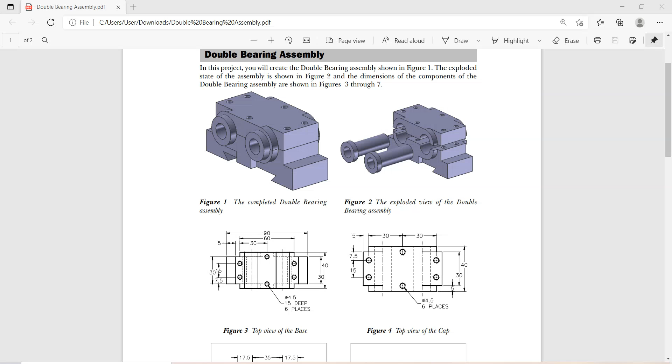Today we are going to see how to make this cap from this double bearing assembly. For that we are going to make this sketch first. This is the top view and this is the front view.

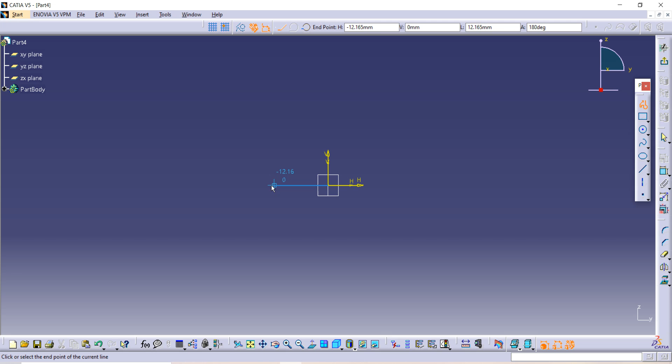Now let's start it. First go on CATIA, select plane and then go on sketch option. After that select this option, extend it, then use this command to make one small circle.

Again make sketch as shown in figure. After that, since sketch is already selected, I am using this mirror command and then this axis, so it will be mirrored. Now we are going to use this constraint command.

See, all dimensions are given here. Now let's make it.

Radius of this circle is given as 7.5. After that, distance between this line to this line is given as 70.

Length of this point, length of this line is 12.5.

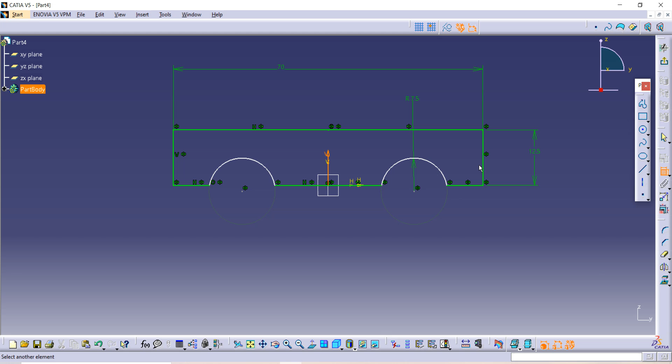Distance between this to this point is given as 30. And now one remaining part is we have to give constraint.

Select this point with this and go on constraint and then coincide. Now our whole sketch is in green color, so it's fully constrained. Then go on exit to workbench option.

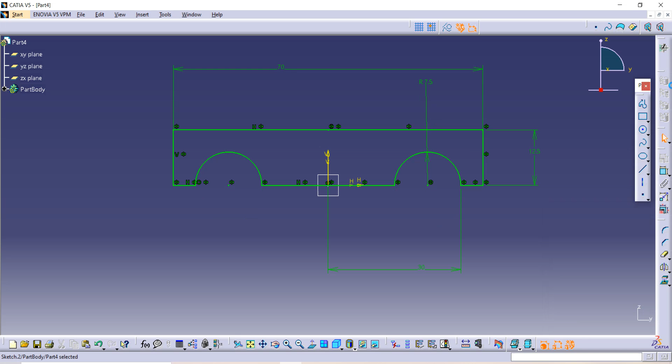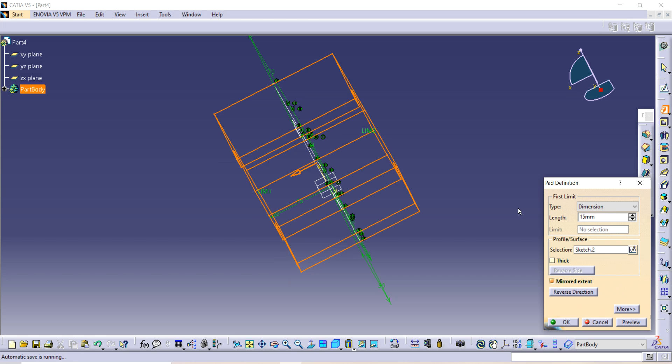After that use this pad command and given pad is of 30, but we want this plane at the center of our entity, so I am giving here 30 divided by 2 and selecting this mirrored extent, so it will be 15 to this side and 15 to this side. Make preview and then OK.

After that, we want to make another sketch on this surface, so select this surface, go on this sketch option and now use this projection to make sketch simple. Select this axis now and this one also.

Now take one circle command, make circle. After that, dimension of given circle is 12.5 as radius, so it will be 25.

After that, use this trim command to trim unwanted parts. Now I deleted it because it was over constrained. It's showing us that it was over constrained.

After that select all the lines by using control option and go on this mirror and select this. Again I am selecting these lines and mirror option and then axis.

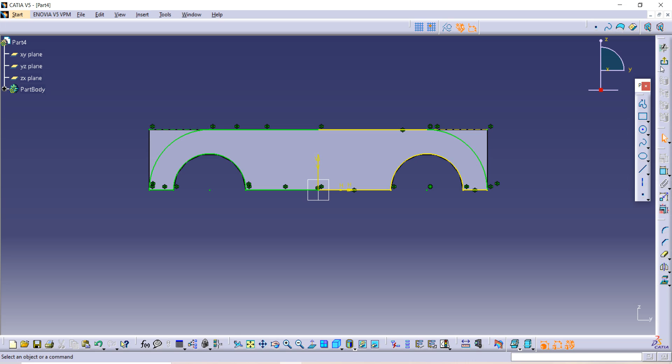After that exit to workbench and then use this pad command. The length is given as 5 to one side, then click on OK. After that use this mirror command and they are asking here for mirroring element.

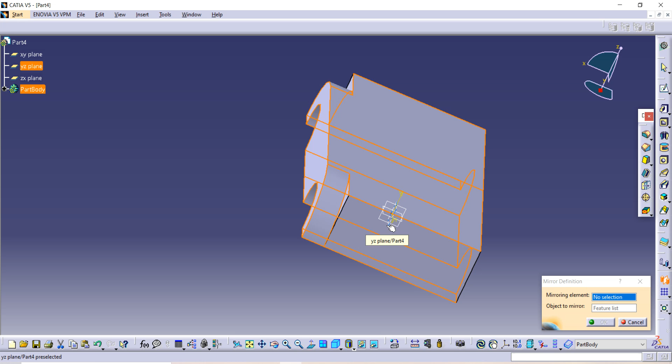We are going to mirror this element with this plane, so select this plane and then OK. Now you can see here mirror is developed on this side also.

Now select this surface, then go on sketch option. Because we have to create holes, you can see here are holes, so we are going to make it.

Now circle, make one circle of diameter 4.5. 4.5. And now let's give distances.

Distance between this to this is 7.5. And then distance between this axis to this is given as 30.

Actually it was wrong distance. Distance between, wait a second, I am deleting it. Distance between this point to this is given at 7.5.

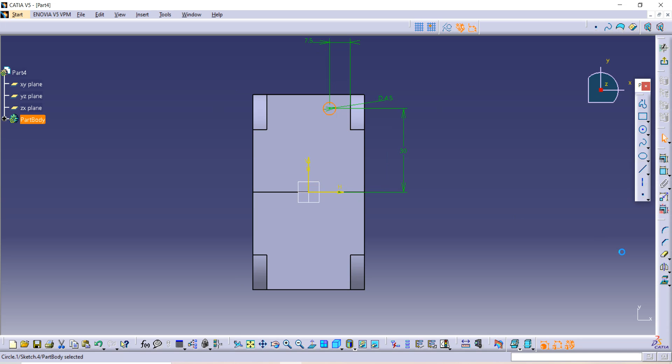7.5. Now select this circle, use this mirror command and mirror that axis, mirror this circle.

After that again use this mirror command and then mirror it again, circle, mirror option and then mirror it.

Now I am going to make one circle of same radius 4.5. Now distance between this point to this line is 5.

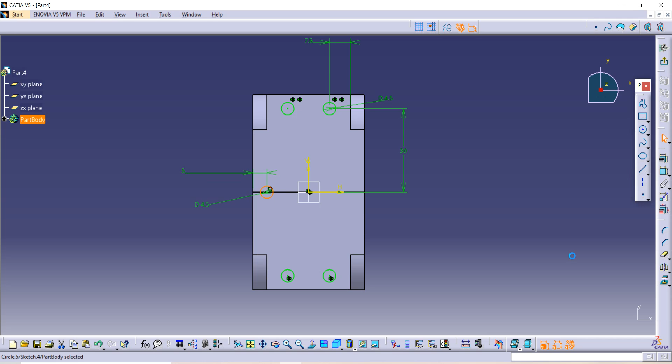After that select circle, use mirror command and then select plane and then exit to workbench. You can see here the holes are till last surface.

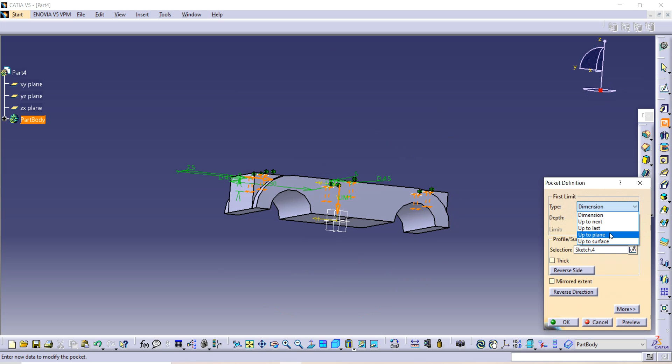So use this pocket command and select here up to last. So they will extend till last and then OK. Now you can see here this cap is ready.